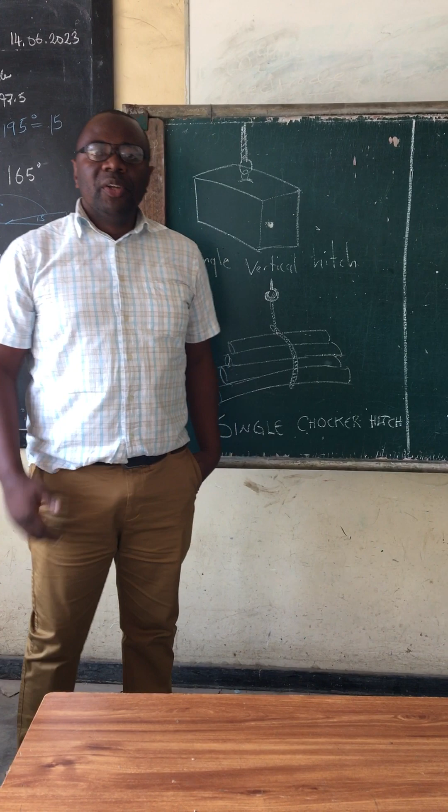Today we are looking at slinging technique. Now this technique that we are looking at is widely used in the industry of lifting various loads. Rigging is one of the interesting courses on earth, and actually what we are about to learn today will give you hints and ideas of lifting, not only in rigging, but it also applies to our day-to-day activity.

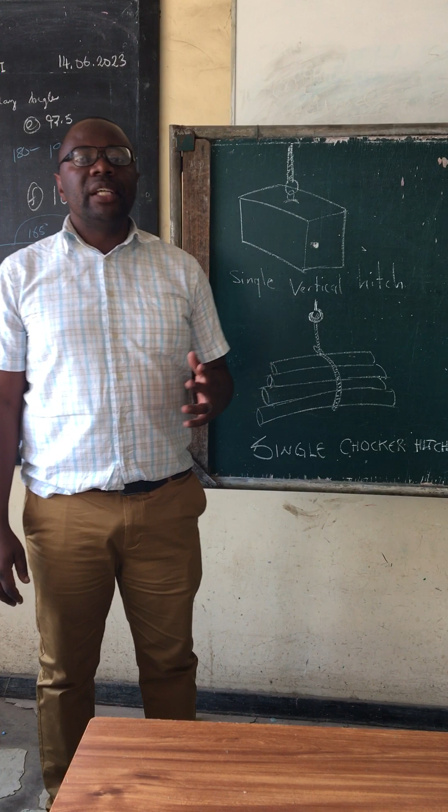Quickly in this video, I'll just mention some of the techniques that we use to lift loads or objects in rigging. And our first type that we are looking at is known as a single vertical hitch. Now, with this type of slinging method, single vertical hitch, the center of gravity has already been calculated for you by the manufacturer, and they have put what is known as a lifting point.

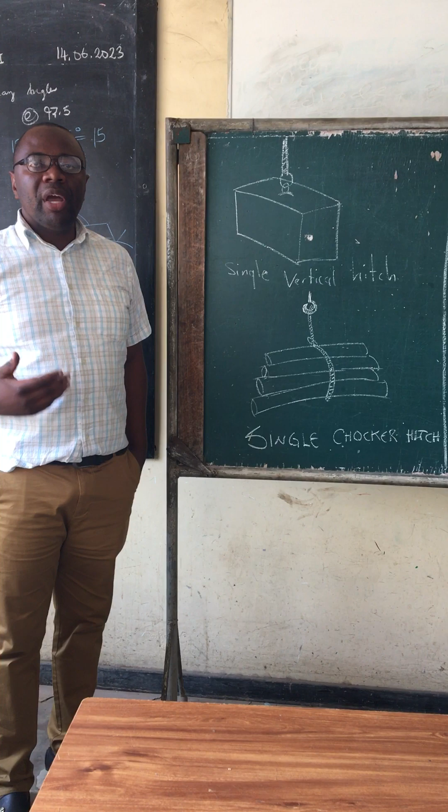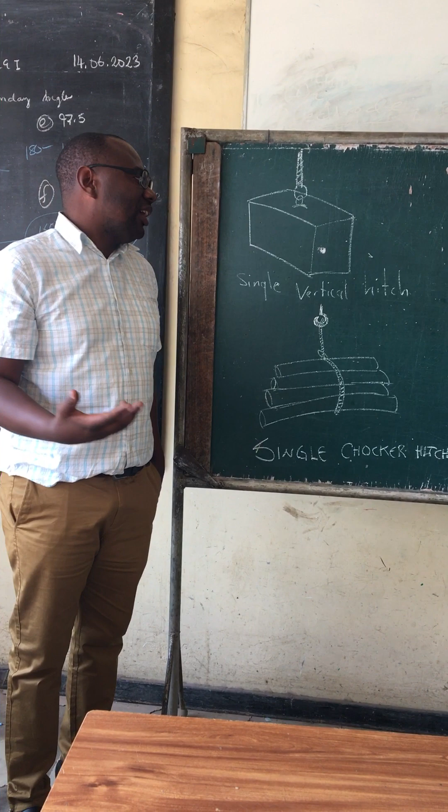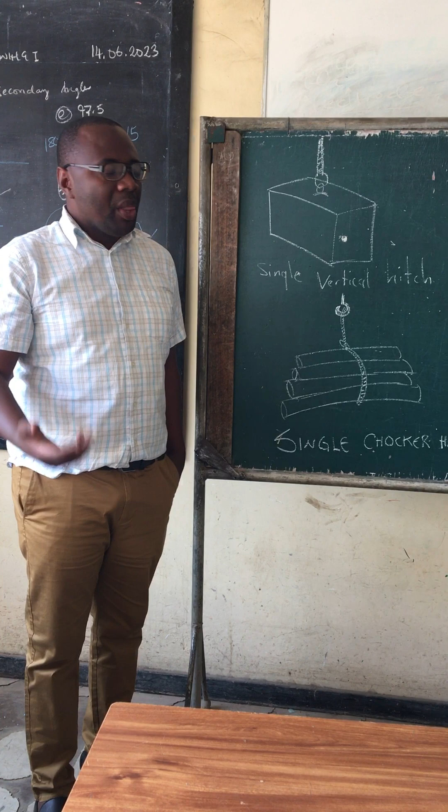So you lift this type of load from the lifting point because the center of gravity was determined by the manufacturer. If you're in the factory or the workshop and you see a lifting point, I guess this is one of the simplest methods that you can ever employ. And actually, this can be used to lift light loads. Heavier loads come with what are known as lifting lugs, lifting points already calculated for you by the manufacturer. So a single vertical hitch definitely is for lifting light loads and many other loads, to mention but a few.

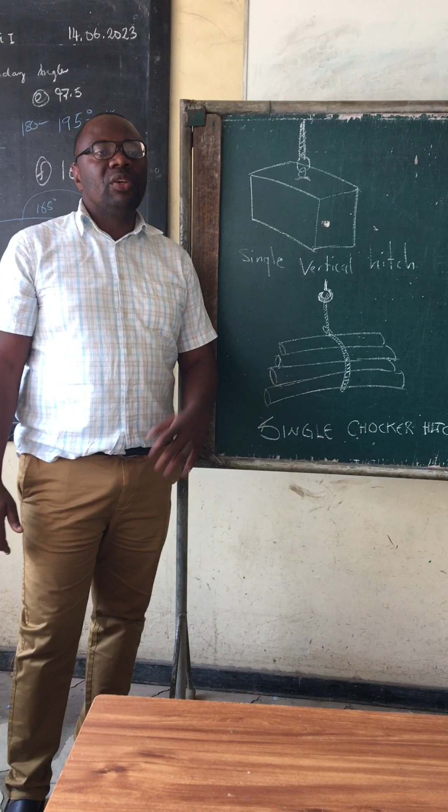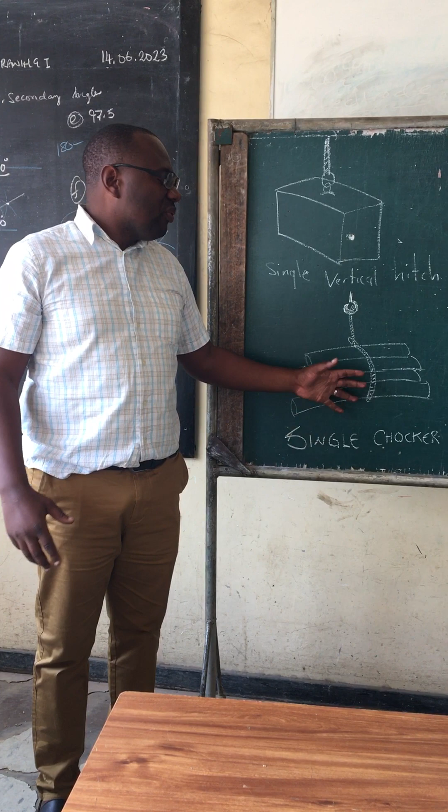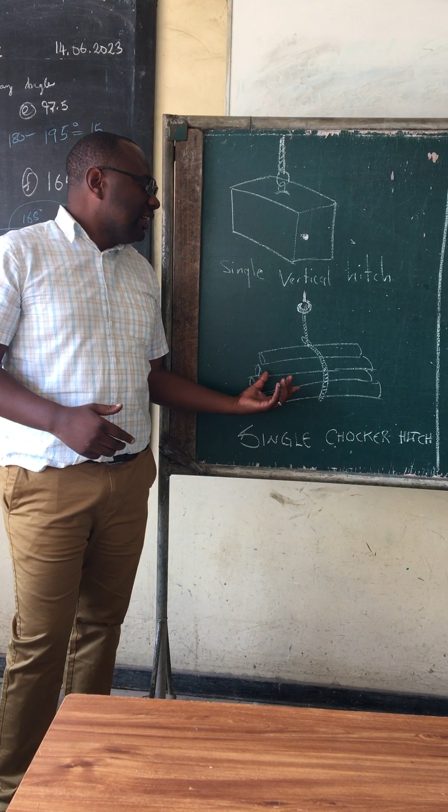Then the next one that we have is known as a single choker. The most troublesome objects or loads to lift in an industry are cylindrical objects. Hence the discovery of a method known as a choker hitch sling. Now, the advantage of a choker hitch sling is that it provides grip on the load. So, by virtue of providing grip on the load, it makes lifting easy for cylindrical objects such as pipes and any other cylindrical object that you may think of within the industry.

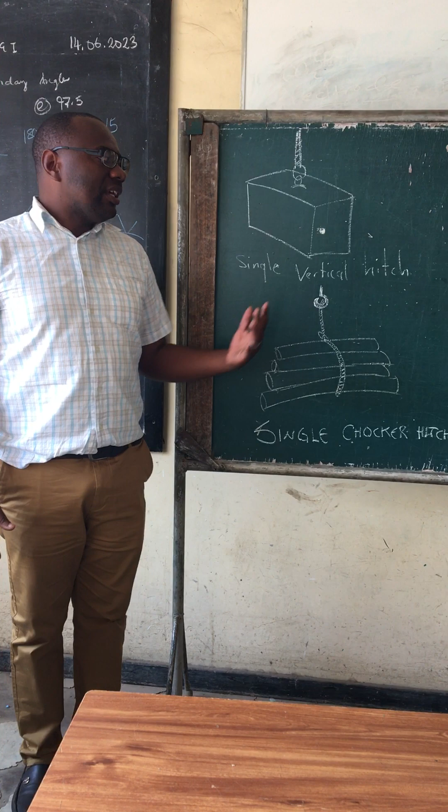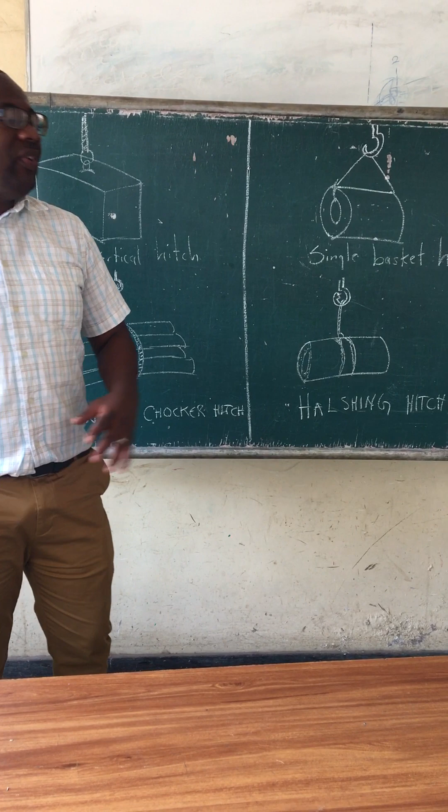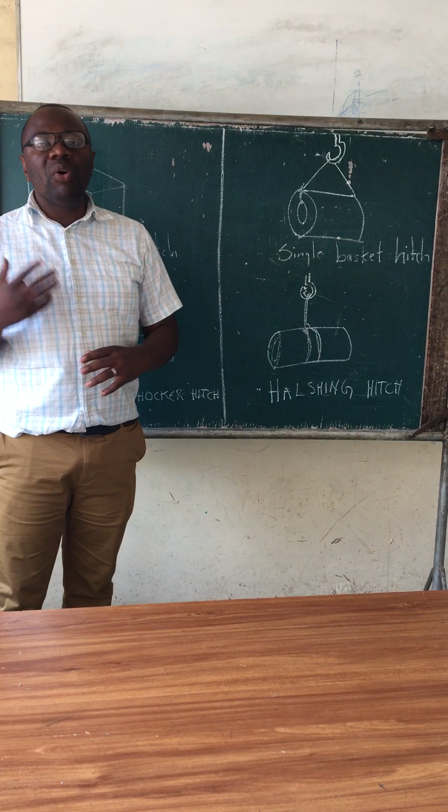So as we zero in, let's look at a method known as a single basket hitch. When we are talking about a single basket hitch, basically we are looking at a lifting technique that shares the load equally between the sling legs. May I mention to you that if you are using a single basket hitch, your included angle between the slings should be 90 degrees. Now, the sling comes from the hook, it passes through the rod and it goes back to the hook.

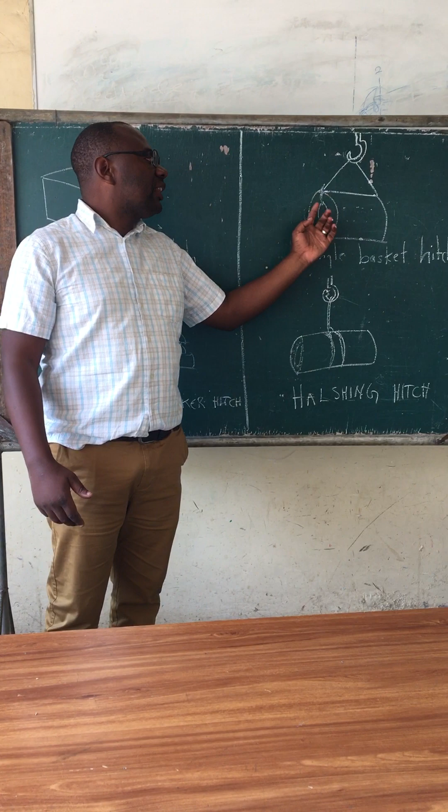Remember, in my previous video, I mentioned the use of padding and protection material, such as rubber and cloth. So, when you put padding or protecting material here, it protects the slings from sharp edges. We'll explain more later on in the workshop when we'll be doing our practical and lifting these things. Then the other one is known as a halshing hitch.

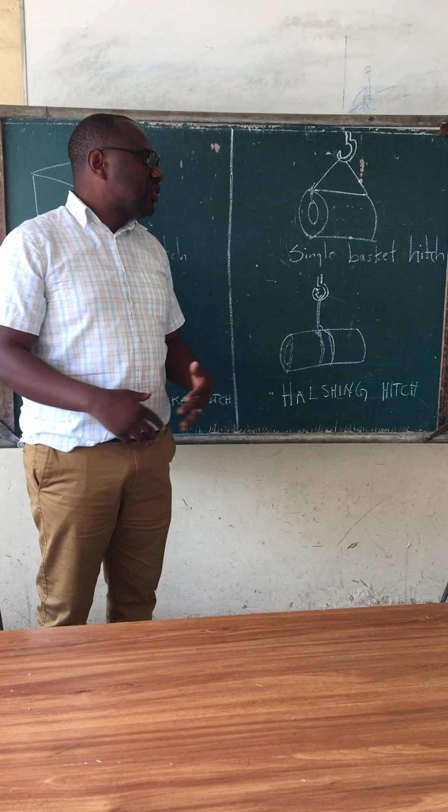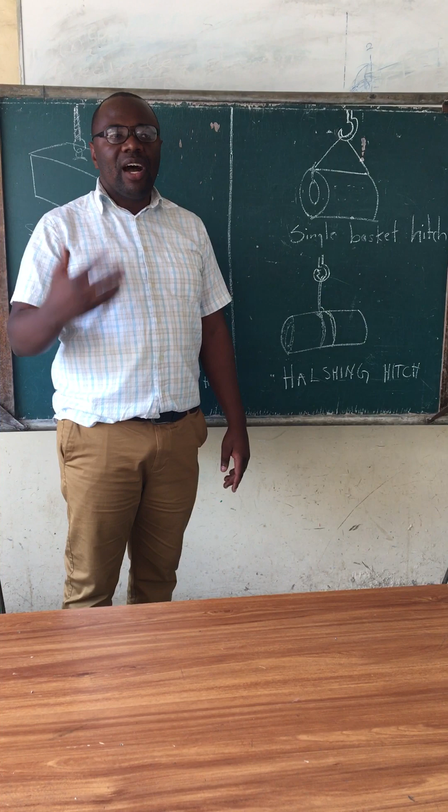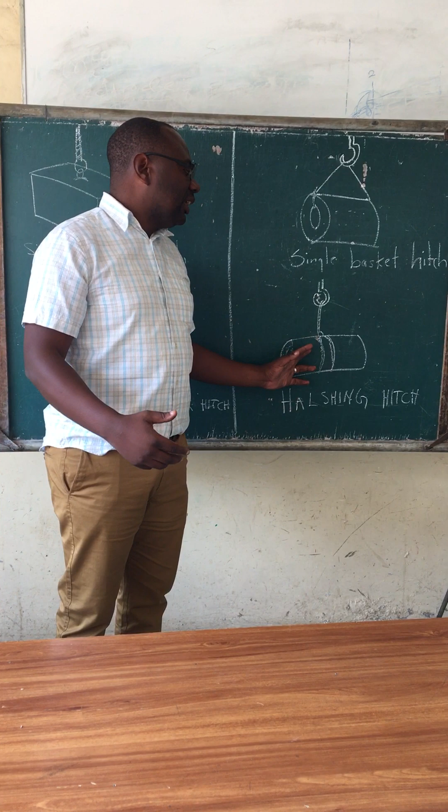In rigging, we have got what is known as the halshing hitch. This hitch is also basically used for lifting cylindrical objects. If you see this hitch and you see a choker, you may mistake one for the other, but there is a difference. The difference with this hitch is that both eyes of the sling go to the hook, compared to a choker.

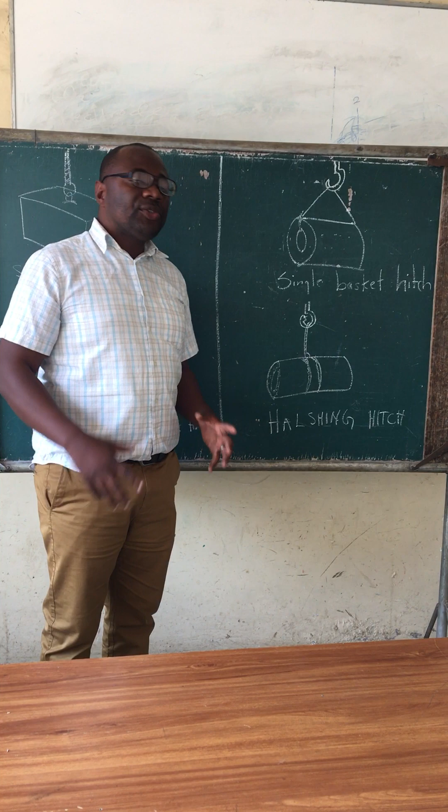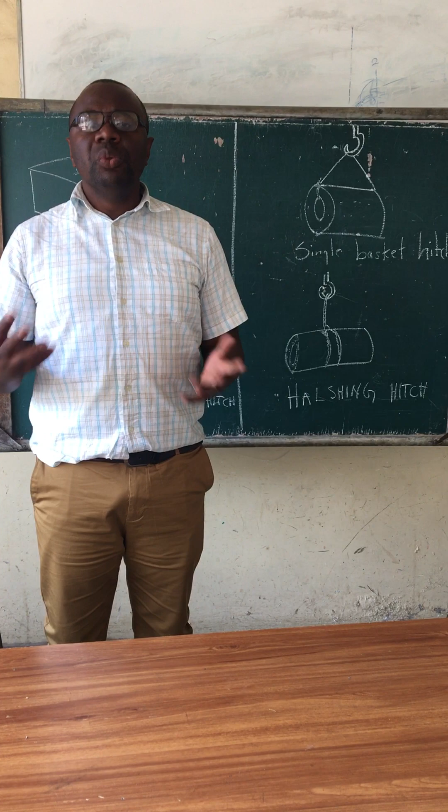So these are some of the slinging techniques or methods that we have in the industry. In the next video, we'll zero in to look at the bridle, 2-leg, 4-leg, even a double up, to mention but a few.